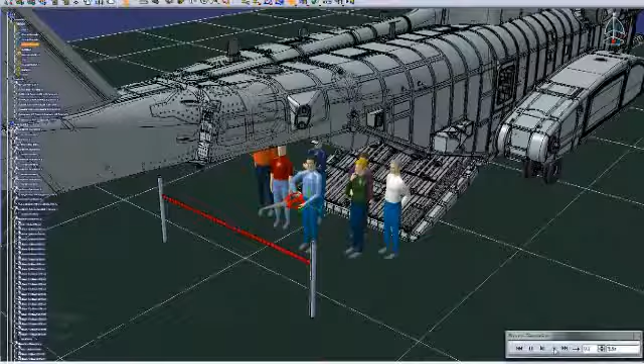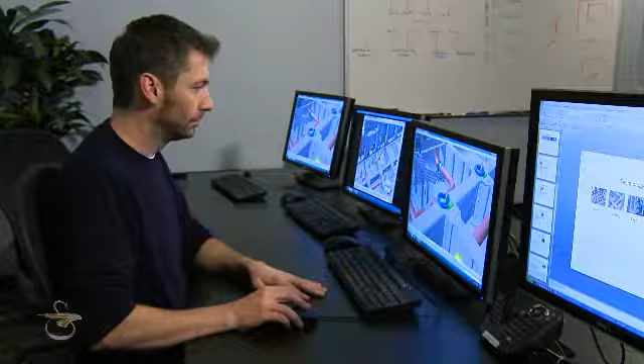Sikorsky Aircraft has officially launched a new virtual reality center for the CH-53K heavy lift helicopter program, taking the manufacturing of the next generation heavy lift helicopter for the United States Marine Corps into a whole new dimension. Engineering is all about making things and making things better. And when you're engineering helicopters, you've got a lot of things to consider.

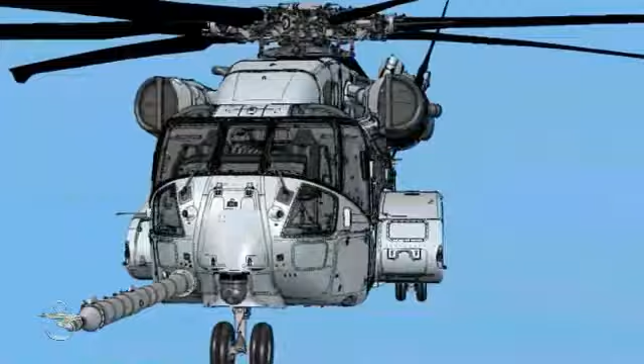Due to the size and complexity of the CH-53K helicopter, we had to be creative in adopting its design and development. The Virtual Reality Center is housed within the engineering laboratories at Sikorsky's main manufacturing facility. 12 cameras are strategically placed high along the walls, capturing movements of the operator, who is then immersed into the CH-53K digital environment. Head-mounted displays, sensored gloves, and a force feedback system allow virtual interaction with the aircraft.

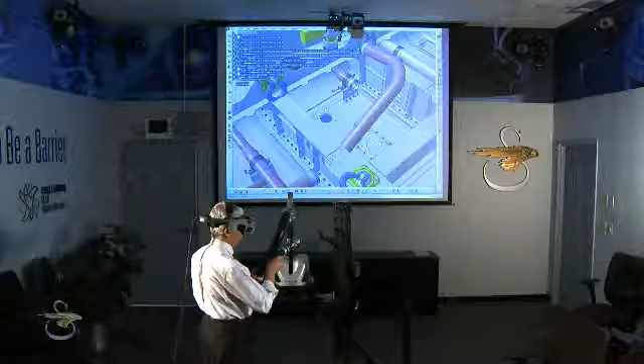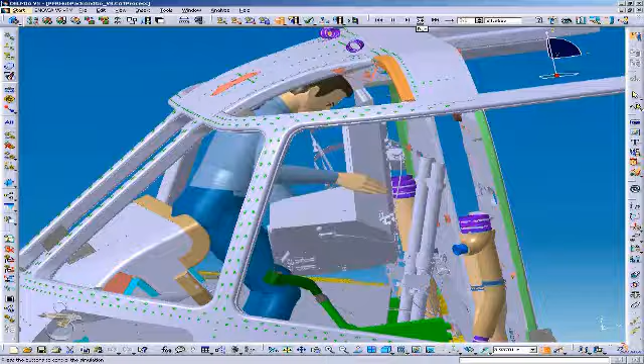All data processing and recording takes place at the command center in the back of the room. Until recently, the work of the engineer was complicated by the limits of the physical world, and the testing and retesting that accompanied that environment was inefficient and costly. Now we can perform installs in this virtual, computerized, three-dimensional environment that allows us to animate the parts to see how they'll fit. All of this innovative technology comes together in what Sikorsky deems to be perhaps the most complex aircraft development it has ever undertaken.

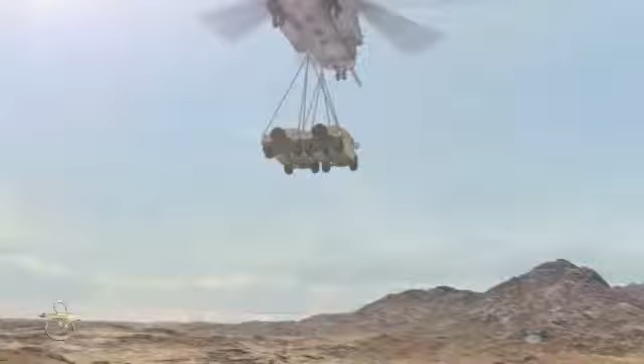Sikorsky is building the CH-53K heavy lift helicopter under a $3 billion system development and demonstration contract with the United States Marine Corps. The heavy lift mission is critical. It calls for an aircraft that can stand up to the daily punishment of temperature extremes, high structural loads, and harsh conditions that are associated with shipboard and austere location operations.

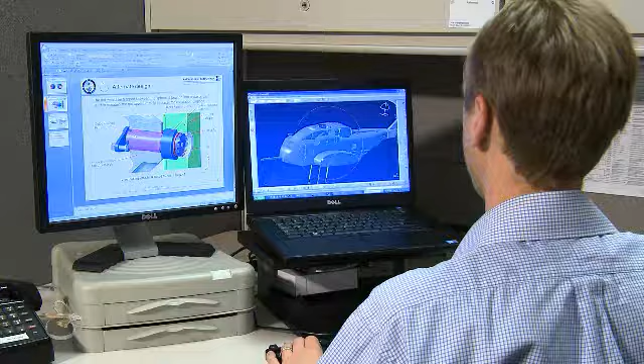Developing this large, complex aircraft is no small task. The use of a virtual reality center offers tremendous efficiencies, saving time and money in identifying design gaps long before the real components are ever assembled. We're building a helicopter that will have more than 20,000 individually designed parts, all of which have been modeled in a fully 3D digital environment.

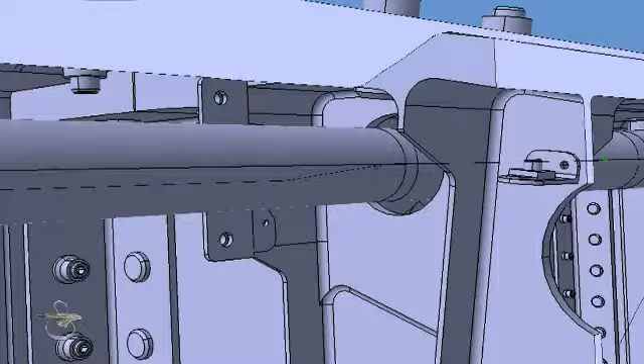Using the aircraft components the designers create with CATIA software, they can now determine whether the parts can be assembled within the required manufacturing clearances that are revealed by a color coding process. We have already yielded design benefits from the new software. We uncovered a handful of fuel lines that required modification because the parts would not fit into the aircraft as originally designed, or would have been damaged upon installation. We've estimated savings of about $18 million for this one event alone.

The efficiency of the Virtual Reality Center will carry over to the maintainer's role, ultimately delivering to the customer a one-of-a-kind machine, the most capable helicopter ever built.